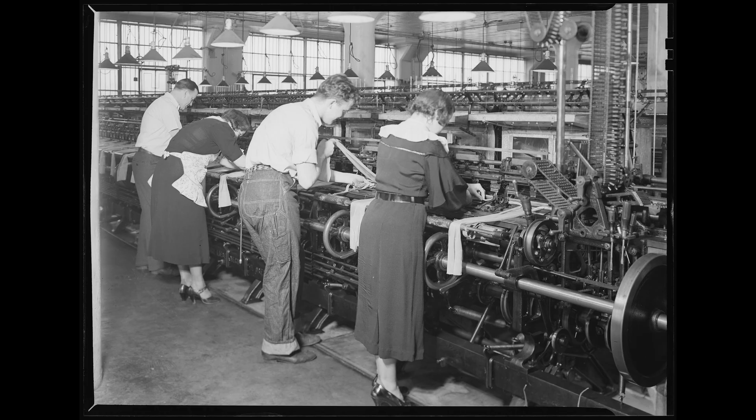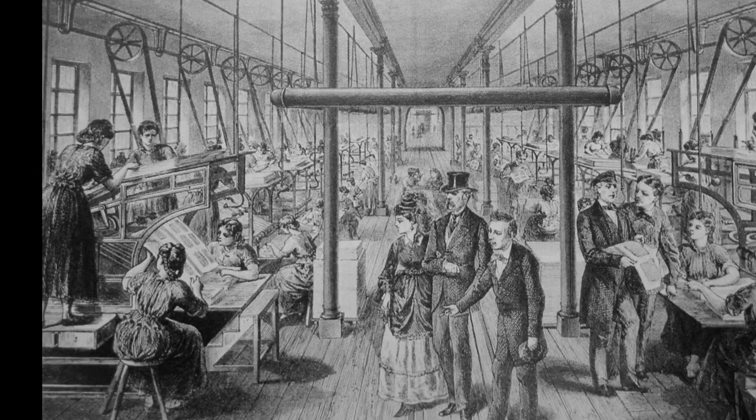In the early 1800s, the world changed forever. Steam engines roared to life, factories multiplied, and for the first time, machines began to outpace muscle. The Industrial Revolution didn't just transform economies, it rewrote the very fabric of society.

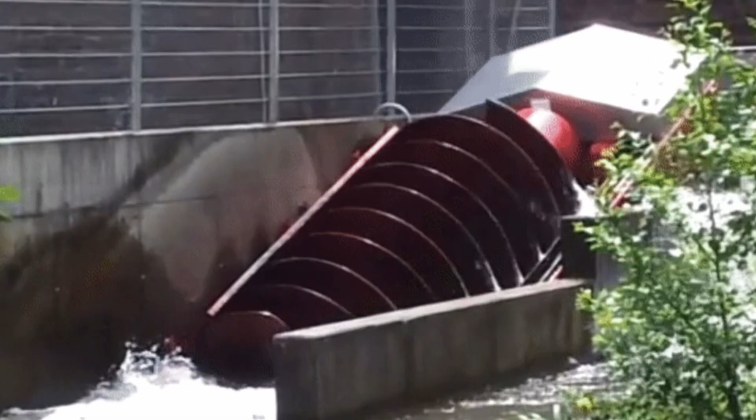Nations shifted from agrarian to industrial powerhouses, and with that shift came a new dependency, not on crops or kings, but on engineering. But as machines grew in size and speed, something unexpected started to happen. Metal parts began to crack, not from a single heavy load, but from repeated use over time. Bridges collapsed, trains derailed, and for a while, no one really knew why.

This was the dawn of a new field in mechanics, fatigue, a phenomenon that would force engineers to rethink everything they knew about strength, safety, and how materials behave under repeated stress. And it's not just a problem of the past.

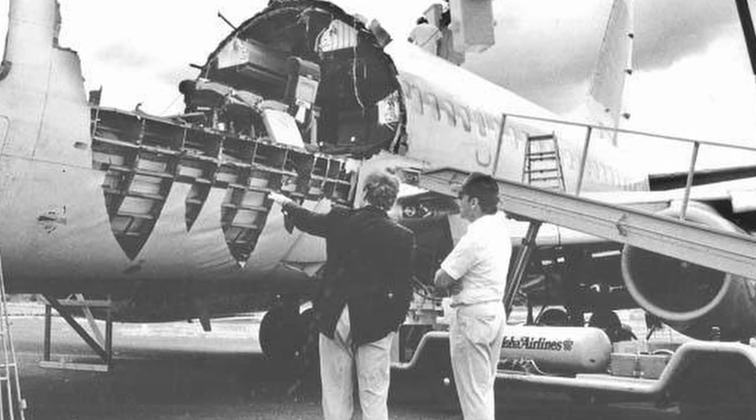Dramatic failures still happen today, like the 1988 Aloha Airlines accident, where a section of the fuselage tore away mid-flight due to undetected fatigue cracks in the aircraft's skin. Incidents like these remind us that fatigue is not an old problem, it's a persistent one, and understanding it is critical for any practicing engineer.

In today's video, we'll start with the historical roots of fatigue and then dive into the modern tools engineers use to analyze it. We'll break down stress life, strain life, and the linear elastic fracture mechanics approach, and then discuss when each is the right tool for the job. So without any further ado, let's get into it.

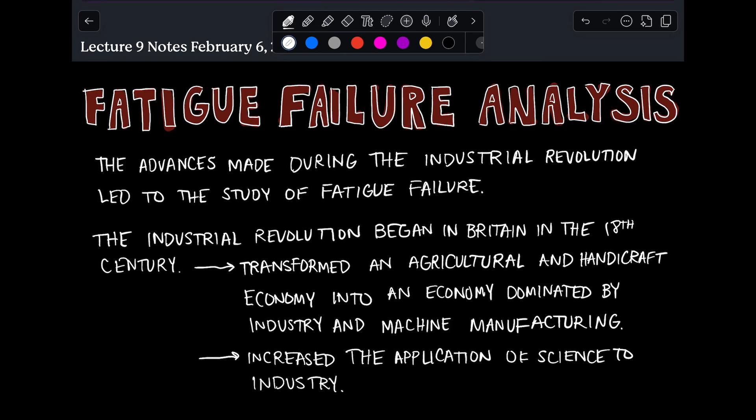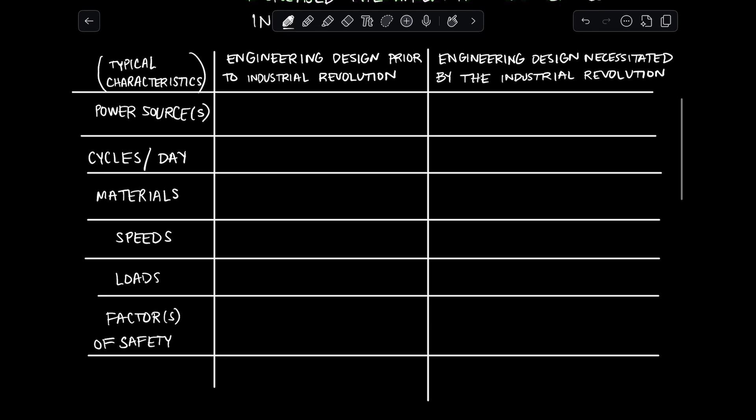All right, let's fill in this table. So on the leftmost column, we have some typical characteristics of engineering design. In the middle column, we're going to list out those characteristics prior to the Industrial Revolution, and then on the right column, we will list out those characteristics after the Industrial Revolution.

So, prior to the Industrial Revolution, we had engineering design that was primarily based on static loading. Our speeds are relatively slow, our loads are light, and our factors of safety are large. Typical power sources prior to the Industrial Revolution would include the water wheel, and a water wheel might cycle, let's say, a maximum of about 10,000 cycles per day.

The materials that were used for construction of engineering designed machines would include things like wood, stone, and simple metals. So unprocessed metals, think of things like iron and copper. Again, speeds are relatively slow, probably less than 10 RPM typically. And the loads are relatively low, maybe a few kilonewtons.

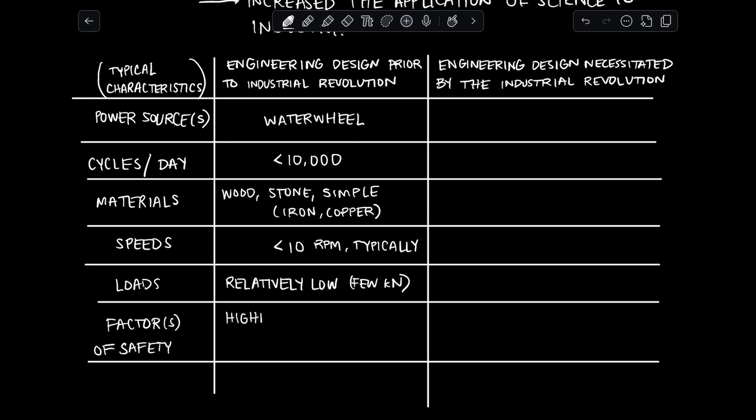And our factors of safety were higher, somewhere between 5 and 10 would be typical, and that's due to material uncertainties. So when you have more uncertainty in your design, typically that means you need a higher safety factor so that when you're on, let's say, the low end of possible yield strengths, you still have some margin of safety left over. Okay, so that's prior to the Industrial Revolution, and then everything really changed upon the introduction of the steam engine.

Which was a typical power source after the Industrial Revolution. And with the development of the steam engine, shafts were expected to run faster, accumulating high repetitions of dynamic and cyclic stresses. So a steam engine shaft, as compared to a water wheel shaft, is going to experience many more cycles. It could accumulate more than 100,000 cycles in a day easily.

Materials that were used for construction of the steam engine and for other engineered products in this time period, which includes the time period that we're currently living in, includes things like steels, alloys, concrete, other advanced metals, and plastics. And of course, there's more.

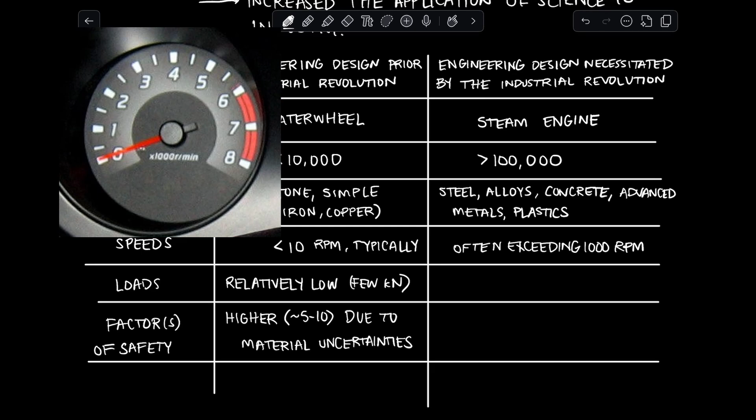Speeds after the Industrial Revolution often exceed 1,000 RPM. You can prove that to yourself by taking a look at the dash in your car to see exactly how many revolutions per minute your engine is cycling, and I can tell you it's going to very often be in excess of 1,000 RPM.

The loads after the Industrial Revolution are relatively high, typically. Of course, there's exceptions. And we're talking about hundreds to even thousands of kilonewtons. And then we have lower safety factors typically. Around 2 to 3 would be a common safety factor.

Of course, that is application specific. But just speaking in kind of generalities here, we've lowered our safety factors for most applications because we have improved material reliability, and I'll just throw in, other engineering advancements.

Okay, so as we improve material manufacturing processes, we get steels and other materials with higher strengths and greater uniformity. So when we have higher reliability, more uniform materials, we get greater confidence in our design for higher stresses and lower factors of safety. However, once we did this, we increasingly saw machine members failing suddenly and often dramatically under these fluctuating stresses. So a key characteristic of these failures that were observed was that it was happening in applications where there were many, many cycles per day.

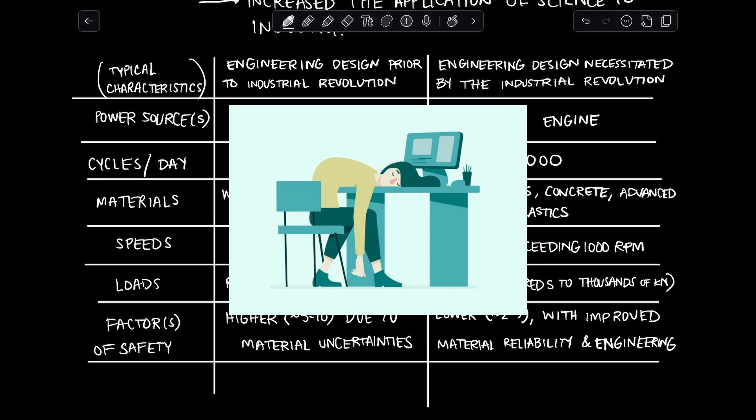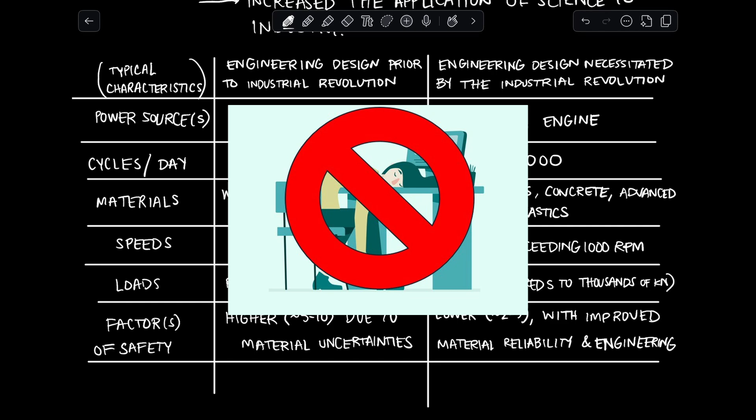And so the common wisdom at the time that this phenomenon was first being observed was sort of, well, the materials are just getting tired. They're experiencing so many repetitions of these loads that they just fatigue. And that's where the term fatigue comes from. But actually, the material itself is not changing. What I mean by that is the material properties are not changing. So if you take a failed part that has experienced fatigue failure and test its material properties, you'll find that they're the same before and after the failure.

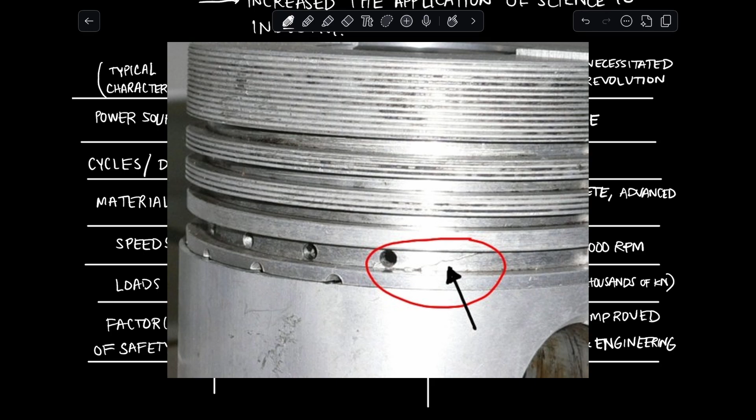What's actually happening is there are cracks or defects that are starting cracks that eventually propagate to failure after repeated cycles. So there has been a lot of research in this area since the start of the Industrial Revolution, and the development of fatigue failure analysis techniques continues to advance. This is still a very active area of research. And so it's a very interesting topic for us to study.

You'll find that as you continue in your education, you will learn topics closer and closer to current day. So we have now entered the turn of the 19th century in your engineering education. And if you go on to graduate school and PhD research, then you'll be on the forefront of the 2020s today.

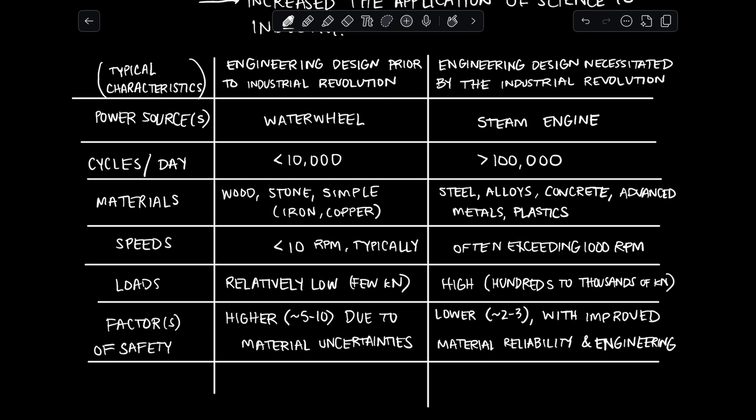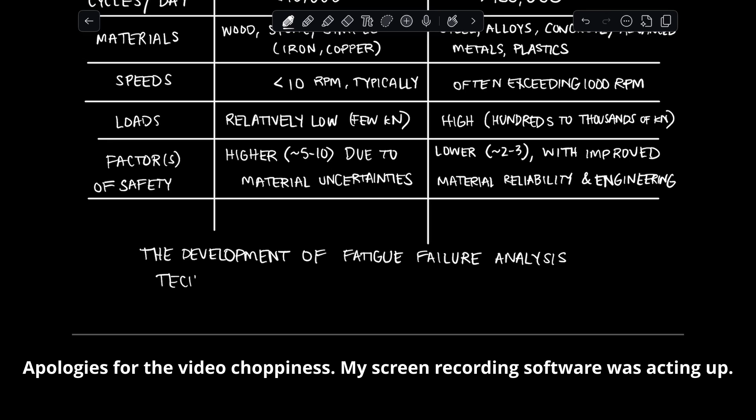Anyway, so the development of fatigue failure analysis techniques continues to advance, and there are three major types of fatigue analysis that we're going to talk about today and compare to try to understand when it is appropriate to use each one of them. All right, first of all, let's think about what our goal is with fatigue failure analysis. So the goal of any fatigue analysis is to predict really two main things. First of those is the number of cycles to failure. So as an example, how many times can I compress and then relieve and compress and relieve a spring? How many times can I maybe lay down on my mattress until the springs start to experience a fatigue failure?

Now, there may not be an exact number of cycles to failure. We may be able to predict that a machine component is expected to have an infinite life. Okay, so our goal is to either predict that our machine component can have an infinite life, or if not infinite, then how many cycles will it take to fail. One important note that I always like to have accompany this infinite life talk is that there are some prerequisite conditions to being able to predict infinite life. And also, of course, this is a theoretical idea that we can have a machine component experience infinite life. And all of fatigue is sort of stochastic and random in nature. So even components where we predict infinite life need to be regularly inspected to make sure that they are still performing.

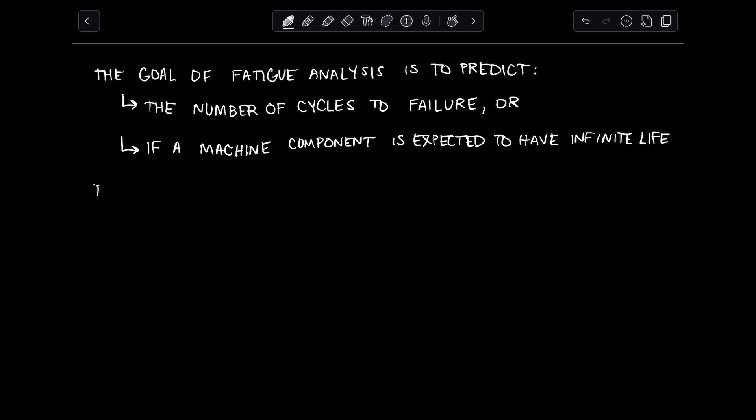And another caveat to this is that there are certain materials that will never be able to have an infinite life. For example, aluminums do not have an endurance limit, and therefore you can never predict an infinite life for a machine component made out of aluminum. Steels, on the other hand, do have an endurance limit, and so you may be able to predict infinite life for machine components made out of steel. Now, as I said earlier, there are three major types of fatigue analysis, which we can use to predict the number of cycles to failure or infinite life for a component. All right, so I'm going to set up a similar table as we had above so that we can compare some of the typical characteristics of each of these three types of fatigue analysis. Let me build up that table and then we'll be right back.

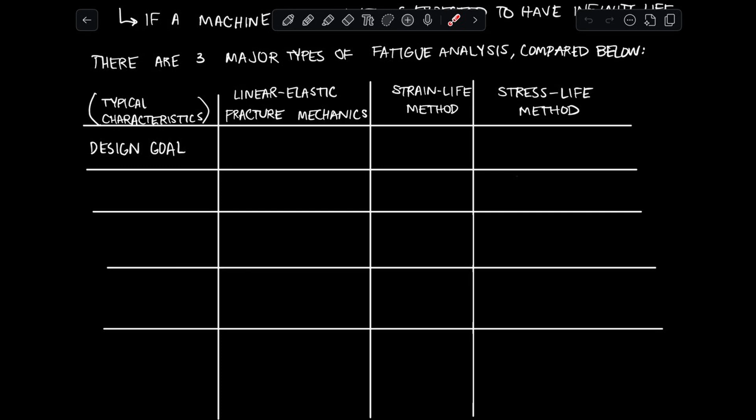All right, so first of all, what is the design goal? For any problem that you're tackling, that's going to be one of your first questions, right? What's your design goal? If your goal is a damage-tolerant design, meaning you're going to assume that you have some starting flaw size, maybe on the order of microns, and you want to understand how big of a defect your design is going to be able to tolerate, then linear elastic fracture mechanics is probably a good method to start with. And when I say linear elastic fracture mechanics, I'm talking about the method we discussed just in the last video, although that one we only discussed static loading. You can take that same framework and apply it to fatigue.

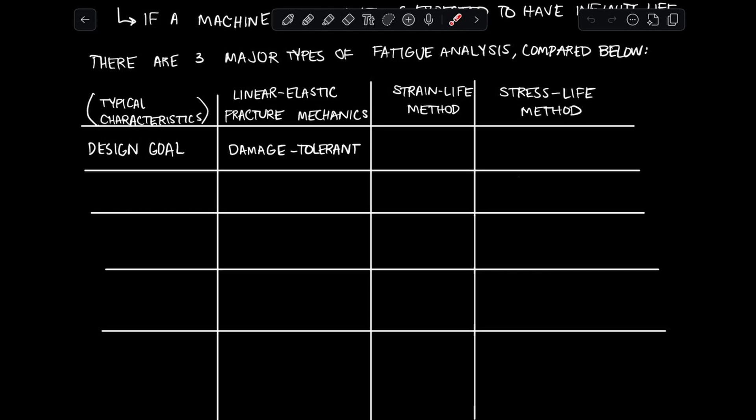All right, now for the strain life method, our design goal when using this method is typically going to be to predict a safe life. So this means we're going to be predicting a particular number of cycles to failure most often. Whereas with the stress life method, we are going to typically be looking for infinite life. We can also use it to predict the safe life, so the particular number of cycles.

And usually you will use the strain life method for lower cycle fatigue and the stress life method for higher cycle fatigue. So if you're expecting to be on the order of hundreds of thousands of cycles, then you'll typically use the stress life method. If it's going to be under, say, 10,000 cycles or so, you'll more often use the strain life method. And there's still active debate in the field on what defines low cycle versus high cycle fatigue, what that exact number of cycles is that distinguishes the two, but around 10,000 cycles is sort of where the consensus lies.

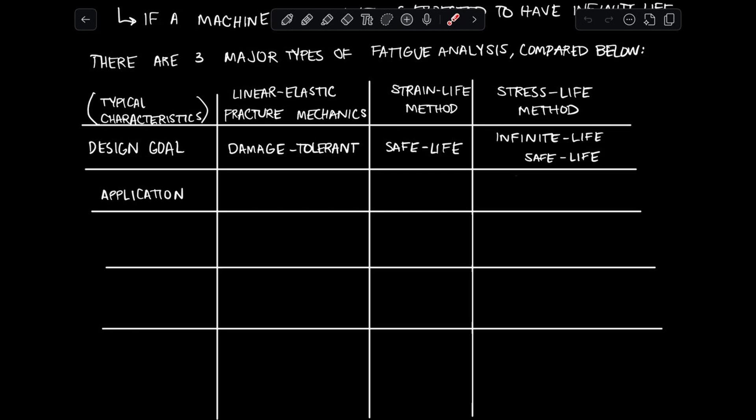Okay, next up, let's talk about typical applications. So a typical application for linear elastic fracture mechanics is aerospace. Aerospace industry uses linear elastic fracture mechanics quite often, and this is because they are very often doing inspections with ultrasonic equipment, measuring flaws that exist in components, and then they want to understand whether that flaw size is acceptable. So they're very often operating with a damage-tolerant design.

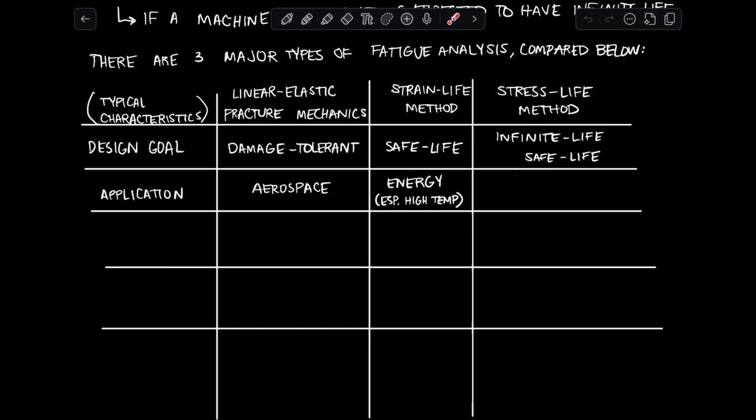For the strain life method, a typical application would be energy, especially in high temperatures. And this is because the strain life method is good at dealing with plastic strains. So if you have high temperature applications where you're going to be experiencing creep or any other type of plastic deformation, then strain life method is going to be able to handle that most effectively.

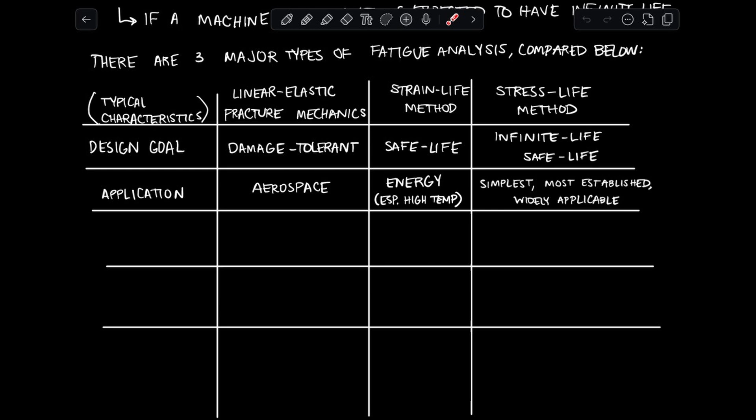Now the stress life method has a lot of applications. It's the simplest method to use. It is the most established method, and it is very widely applicable. All right, so now let's talk about some of the advantages of each, and then we'll talk about the disadvantages.

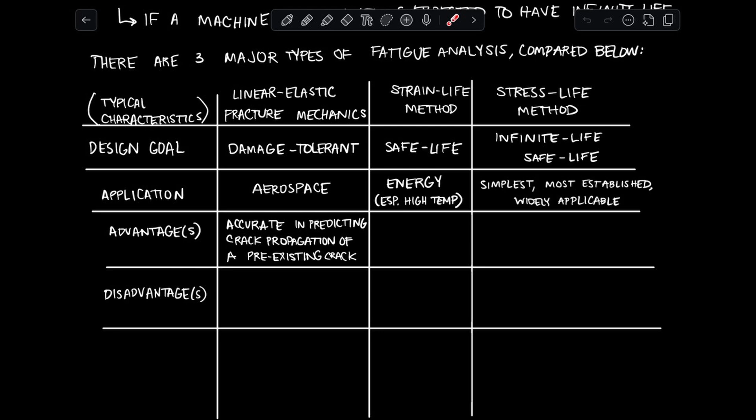All right, so advantages of linear elastic fracture mechanics are that it is fairly accurate in predicting crack propagation of a pre-existing crack or defect. And then let's go ahead and do disadvantages because this leads us right to it. So the main disadvantage of linear elastic fracture mechanics is that it requires knowledge of the crack size, shape, and location.

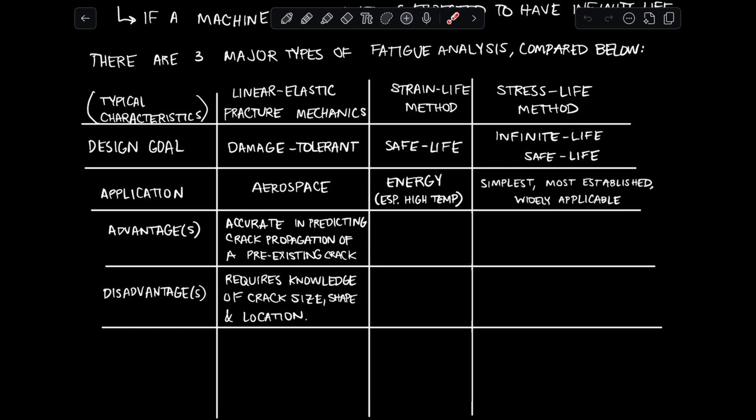All right, so now how about the strain life method? The strain life method, big advantage is that it considers plastic deformation. And this makes it really good for low cycle fatigue. And a really good example of low cycle fatigue would be like taking a paper clip and bending it back and forth a few times. Each time you bend that paper clip, you're going to get some plastic deformation, right? So it's not going to immediately return back to its original shape.

And it's also going to take several cycles before you achieve failure of the paper clip, before it actually breaks and comes apart. So if you were going to try to analyze that fatigue failure of a paper clip, you'd probably want to use the strain life method. Now let's talk about the disadvantage of this, which is that it is a pretty complex method to use, pretty complex analysis, and it requires detailed material data.

So for example, with the paperclip, I need to know not only what is the yield strength of that material, but also the rest of the stress strain curve after yield. So I need to be able to predict exactly how much plastic strain is going to be in the material after each cycle. And if you were talking about high temperature applications, then you need stress strain curves at those high temperatures. So you can see that it starts to get fairly detailed fairly quickly.